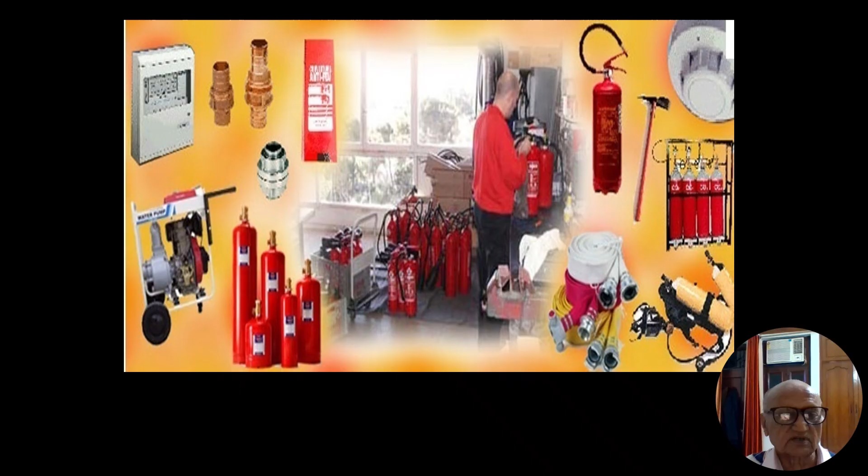This particular slide shows various type of firefighting appliances used in firefighting systems. You can see different type of appliances here in this list.

Friends, engineers and architects and consultants, this is first and foremost warning from me: the firefighting system of any building has to be designed as per National Building Code of India 2016, which is getting converted into the 2025 version also. First, you have to follow the local building bylaws, which inter alia recommend always the National Building Code, in any part of India.

As per Delhi building bylaws, it is the designer who is supposed to submit the following to Delhi Fire Service. Let me tell you that most of the drawings submitted to the authority having jurisdiction are rejected mostly due to the firefighting designs applied for that particular building.

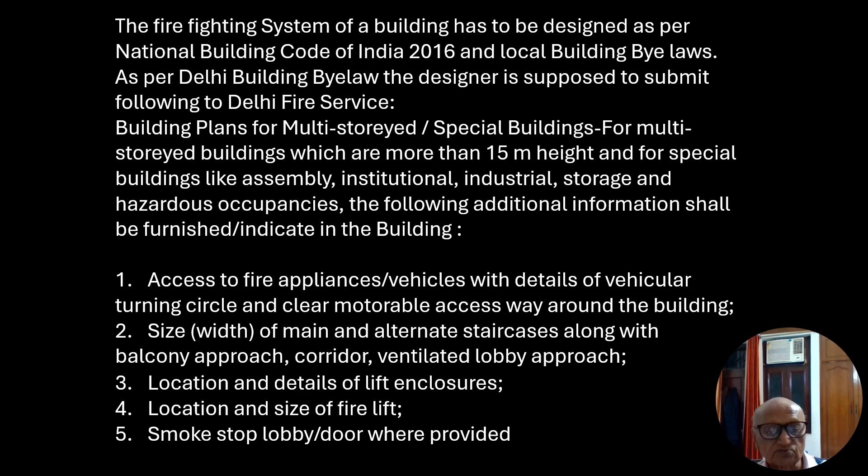In the previous slide, I have discussed all those features which are to be provided in the building drawings being submitted by the architect for building permit initially. Sixth, I have already described 5 items. The sixth item is refuse chutes, refuse chamber, service duct, etc. are to be shown.

Seventh, vehicular parking space. Eighth, refuge area if any. The refuge area becomes necessary only after 5-story buildings. That means beyond 15 meters. Ninth, detail of building services including air conditioning system with position of dampers, mechanical ventilation system, electrical services, boiler, gas pipe etc.

10th, details of exits including provision of ramps, etc. for hospital and special risk buildings. 11th, location of generator, transformer and switchgear room. 12th, smoke exhaust system if any provided. 13th, detail of fire alarm system network. 14th, location of centralized control connecting all fire alarm system, built-in fire protection arrangement and public address systems.

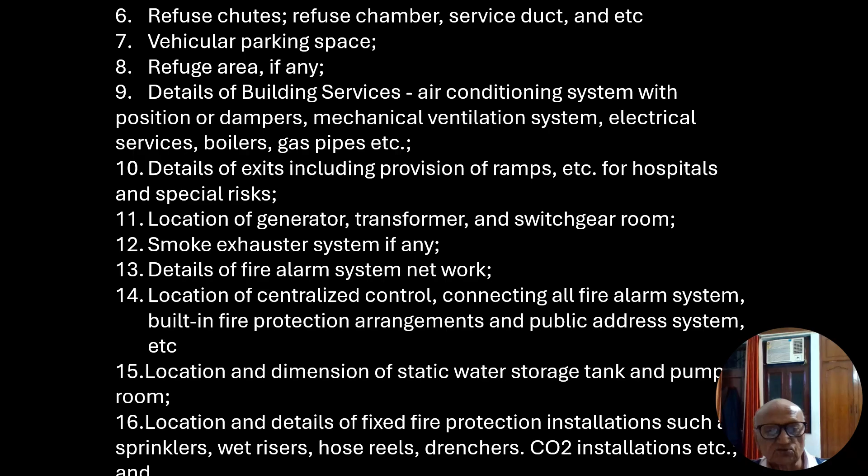Dear friends, consultants and architects, this is the most important part of this series of lectures, that is known as classification of building based on occupancy type. The National Building Code 2016 provides 9 different type of buildings. They are known as Group A or B or C, like that.

All buildings, whether existing or hereafter erected, shall be classified according to use or the character of occupancy in one of the following groups. Once the area has been assigned by the town planner as one particular type, it cannot be easily changed to other type. That is the relevance of grouping. Group A is residential buildings. Group B is educational buildings. Group C is institutional buildings.

Institutional buildings are those where the persons occupying are summoned to get into due to some or the other orders, maybe from a legal court, maybe from a doctor or some other body. Group D is assembly type. Assembly type of buildings are those where people assemble, large number of people assemble for a short time.

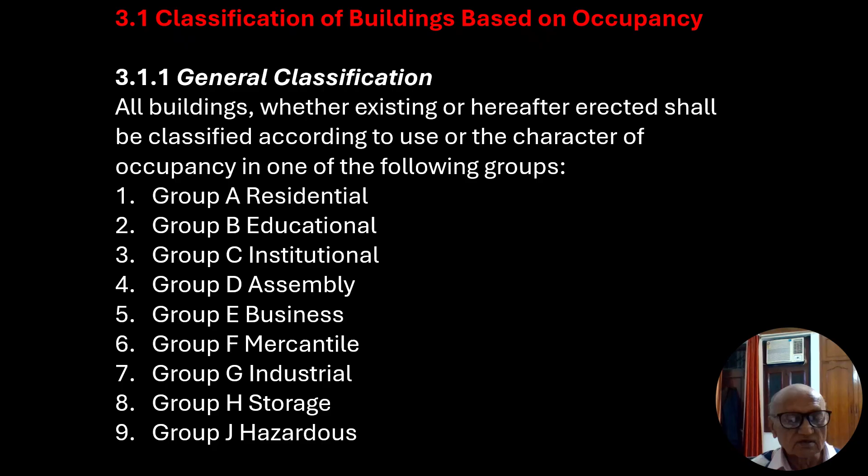Group A residential buildings. Dear friends, the residential buildings are existing anywhere, any type of occupancies. They are classified in four subdivisions. A1, known as lodging and rooming houses and dormitories. Dormitories may be in the form of dharamsala.

A2, one or two family private dwellings, which are for individual use. The buildings in subdivision A3 are known as apartment houses, and subdivision A4 is known as hotels. In hotels, people are residing for very short time.

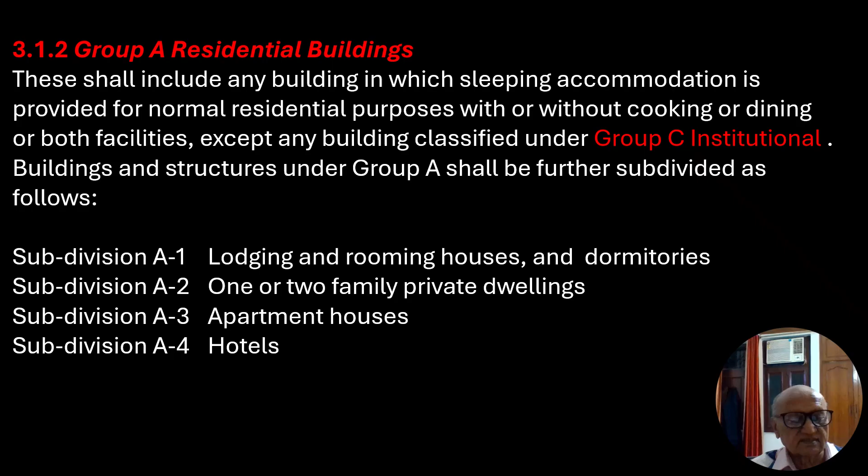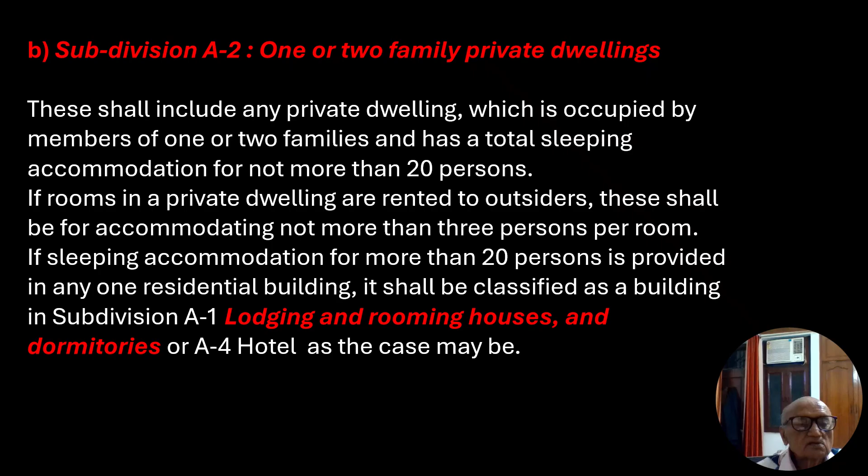Subdivision A3, apartment houses. If we count by number, these occupy the largest subgroup. These shall include any building or structure in which living quarters are provided for three or more families living independently of each other and with independent cooking facilities. For example, apartment houses, mansions, and chawls.

Subdivision A4 includes hotels. This shall include any building or group of buildings under single management in which sleeping accommodation is provided, with or without dining facility, for hotels classified under all hotels including starred hotels.

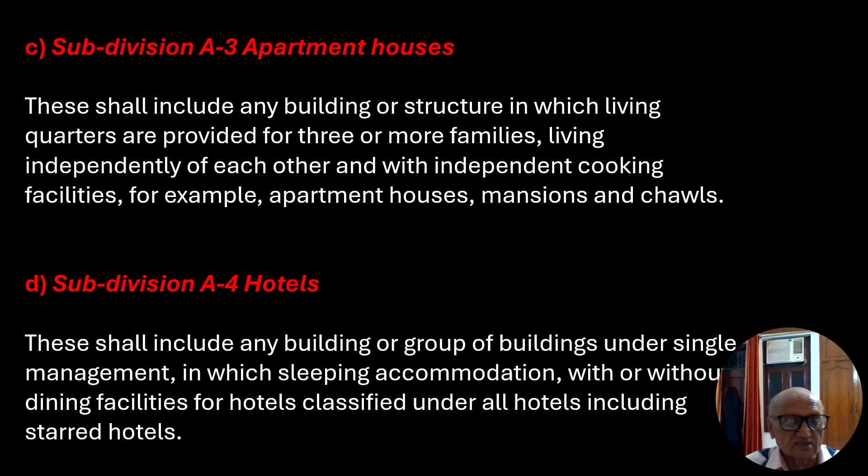Now we are defining group B, educational institution type of buildings. The group B includes any building used for school, college or other training institutions for daycare purposes involving assembly or instruction, education or recreation for not less than 20 students. Group B is subclassified as B1, schools up to senior secondary level, and B2, all other training institutions.

The B1 group includes schools up to senior secondary level. This subdivision shall include any building or group of buildings under single management which is used for students not less than 20 in number. Subdivision B2 includes all other educational buildings. This subdivision includes any building or group of buildings under single management for students not less than 100 in number.

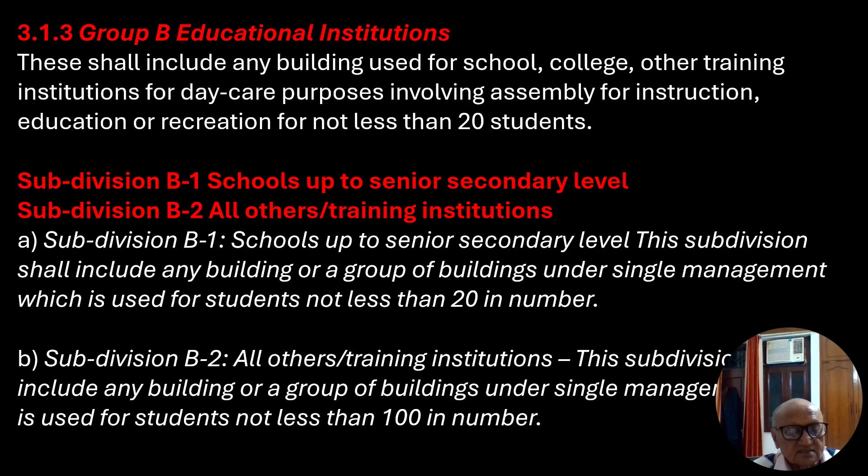Now we come to the group of buildings known as institutional buildings. Institutional buildings shall include any building or part thereof which is used for purposes such as medical or other treatment or care of persons suffering from physical or mental illness, diseases or infirmity, care of infants, convalescent or aged persons, or for penal or correctional detention in which liberty of the inmate is restricted. Institutional buildings ordinarily provide sleeping accommodation for the occupants.

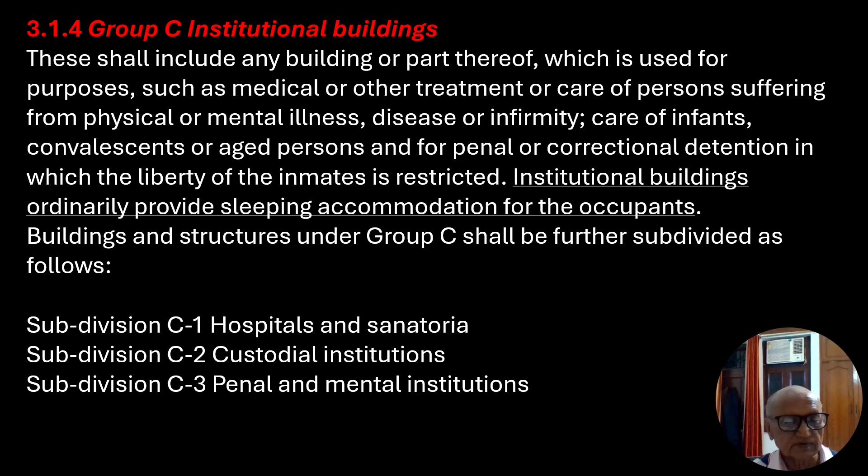Buildings and structures under Group C shall be further subdivided as follows. Subdivision C1, hospitals and sanatoria. Subdivision C2, custodial institutions. C3, penal and mental institutions.

Dear friends, in the previous slide we have discussed the buildings known as institutional buildings, out of which the subdivision C1 is known as hospitals and sanatoria. This subdivision shall include any building or group of buildings under single management which is used for housing persons suffering from physical limitations because of health or age and those incapable of self-preservation. For example, hospitals, infirmaries, sanatoria and nursing homes.

The group C2 includes custodial institutions. This subdivision shall include any building or a group of buildings under single management which is used for custody and care of persons such as children, convalescents, and aged persons who are incapable of self-preservation. For example, homes for the aged and infirm, convalescent homes, and orphanages. Both these types of buildings as a group are known as healthcare buildings.

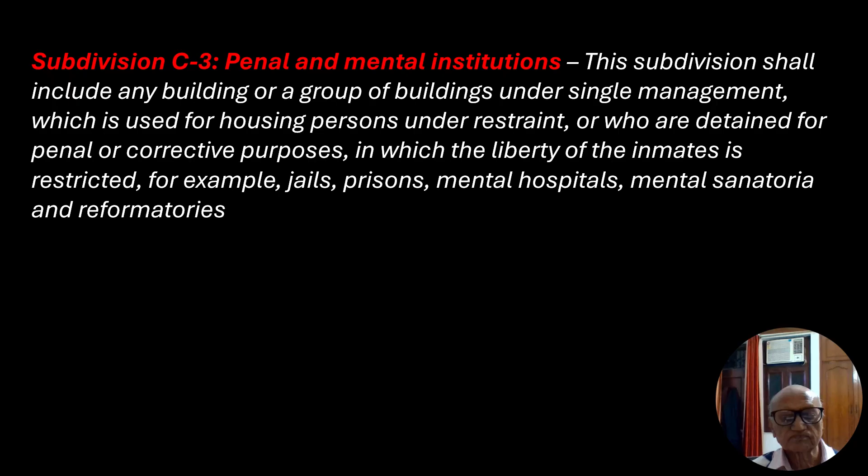Friends, now we come to Group D, assembly buildings. Assembly buildings shall include any building or part of a building where a number of persons not less than 50 congregate or gather for amusement, recreation, social, religious, patriotic, civil, travel and similar purposes.

For example, theaters, motion picture houses, assembly halls, auditoria, exhibition halls, museums, skating rinks, gymnasiums, restaurants, places of worship such as mandir, masjid, gurudwara, dance halls, club rooms, passenger stations and terminals of air, surface or marine public transportation services, and stadia.

Buildings under D shall be further classified as follows. There are four different types of buildings. We'll discuss them in the next slide. Remember only one thing, that assembly buildings are occupied by more than 50 persons.

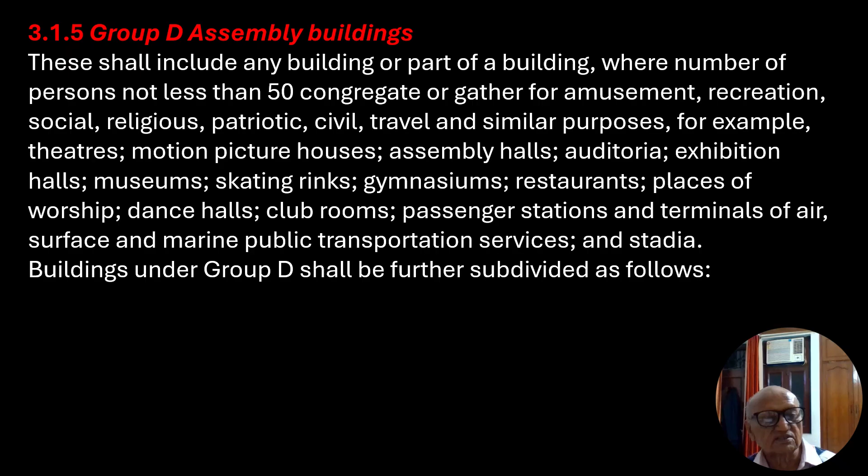Assembly buildings are further classified in four different categories. The first one is D1, buildings having a theatrical or motion picture or any other stage and fixed seats for over 1,000 persons. It's a very large type of system. D2, buildings having a theatrical or motion picture or any other stage and fixed seats up to 1,000 persons.

D3, buildings without a permanent stage having accommodation for 300 or more persons but no permanent seating arrangement. Dance halls, nightclubs, incidental picture shows, dramatic, theatrical or educational presentations, lectures, etc. The type D4, buildings without a permanent stage, having accommodation for less than 300 persons with no permanent seating arrangement.

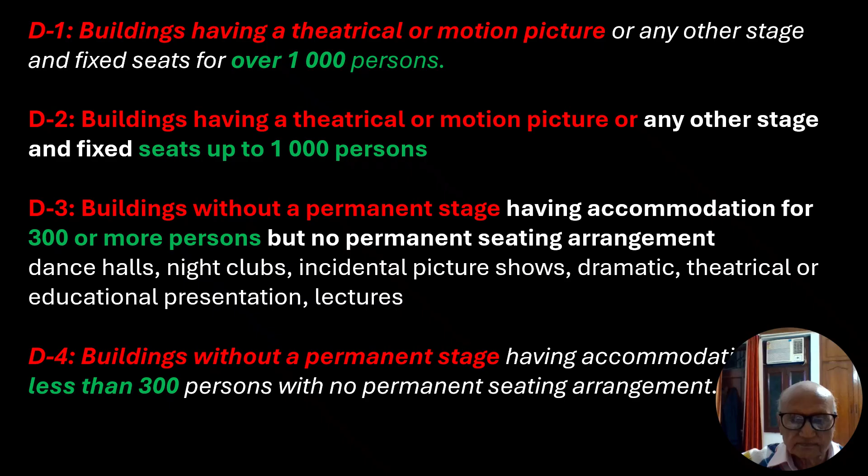The further classification of assembly building is type D5, type D6 and type D7. The type D5 assembly building includes other structures, including temporary structures designed for assembly of people not covered by subdivisions D1 to D4 at ground level, like grandstands, stadia, amusement park structures, reviewing stands and circus tents, arenas, external swimming pools, tennis and similar types of courts.

The sixth type of assembly building is having mixed occupancy, such as shopping malls providing facilities such as shopping, cinema, theater, multiplexes and restaurants, food courts, and having other occupancies such as offices, retail, residential, mercantile, etc. in one building. Type 7 is classified as underground and elevated mass rapid transit systems, underground or elevated railways.

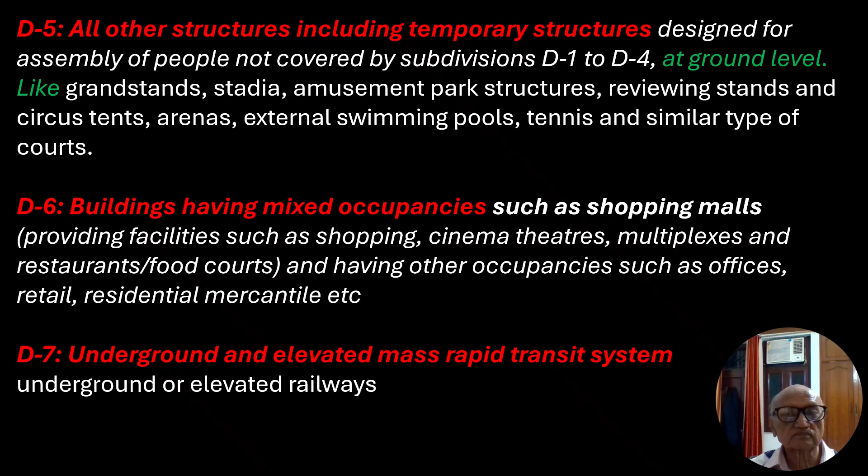Friends, now we are discussing Group E, business buildings. This shall include any building or part thereof which is used for transaction of business, for keeping accounts and records and similar purposes, professional establishments, service facilities, etc. City halls, town halls, courthouses and libraries shall be included and classified in this group so far as the principal function of these is transaction of public business and keeping of books and records.

The group E buildings are further classified in 5 different types. The first one is offices, banks, professional establishments like offices of architects, engineers, doctors, lawyers, post offices and police stations. E2 subdivision of business building is known as laboratories, outpatient clinics, research establishments, libraries and test houses. The third subgroup E3 of business building includes electronic data processing centers, computer installations, information technology parks and call centers.

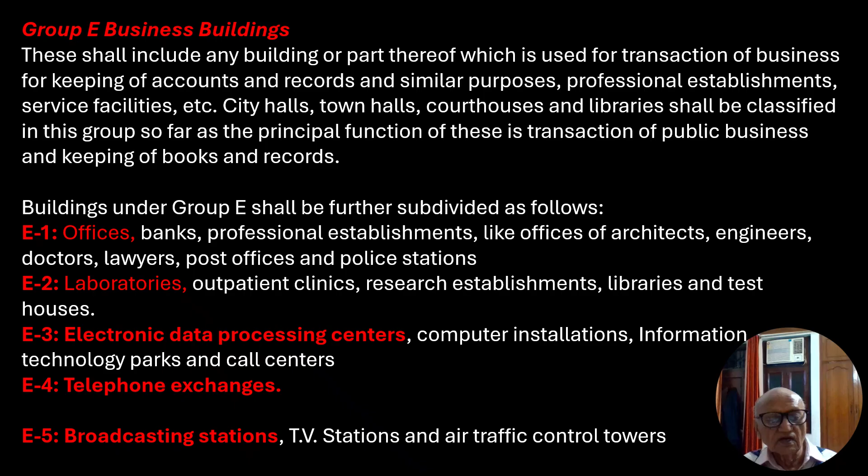The fourth category of business building is telephone exchange. And the fifth one is broadcasting stations, TV stations, and air traffic control towers.

Friends, the next group of building is known as mercantile building. The word mercantile comes from merchant, that means Vyaparis in Hindi. This shall include any type of building or part thereof which is used as shops, stores, market for display and sale of merchandise, either wholesale or in retail. Mercantile building shall be further subclassified as subdivision F1, shops, stores, departmental stores, markets up to covered area 500 square meter.

The subdivision F2 of mercantile building includes shops, stores and departmental stores, markets having covered area more than 500 square meter. The third classification of mercantile building is underground shopping centers. Storage and service facilities incidental to sale of merchandise located in the same building shall be included under this group.

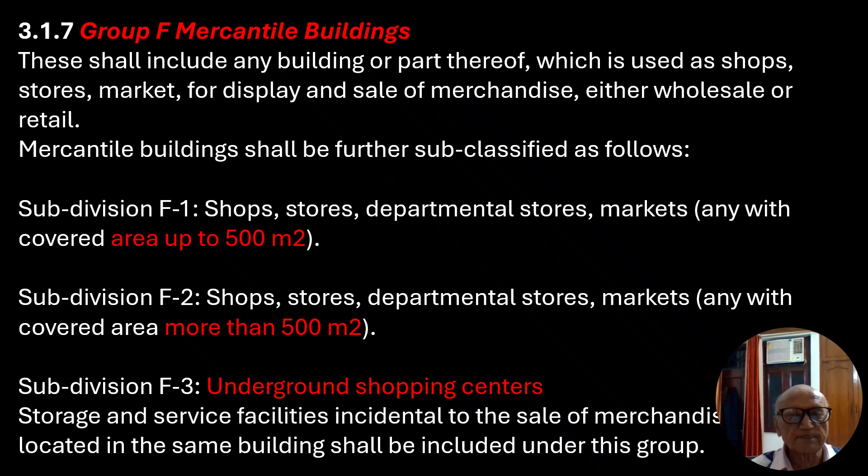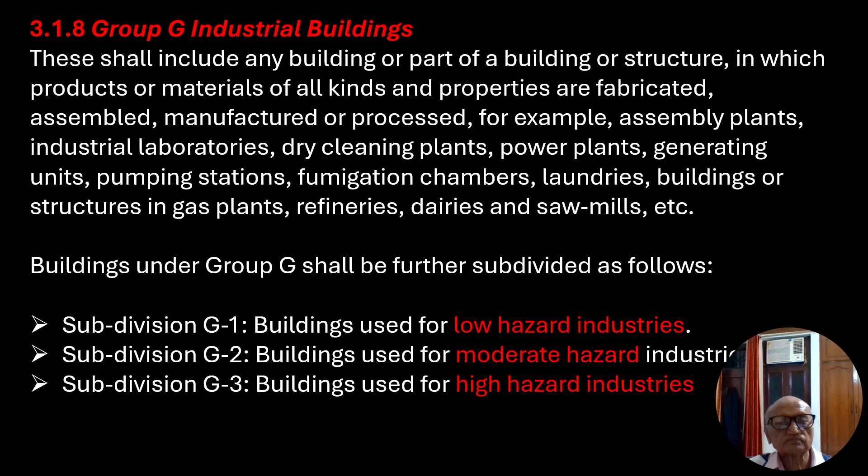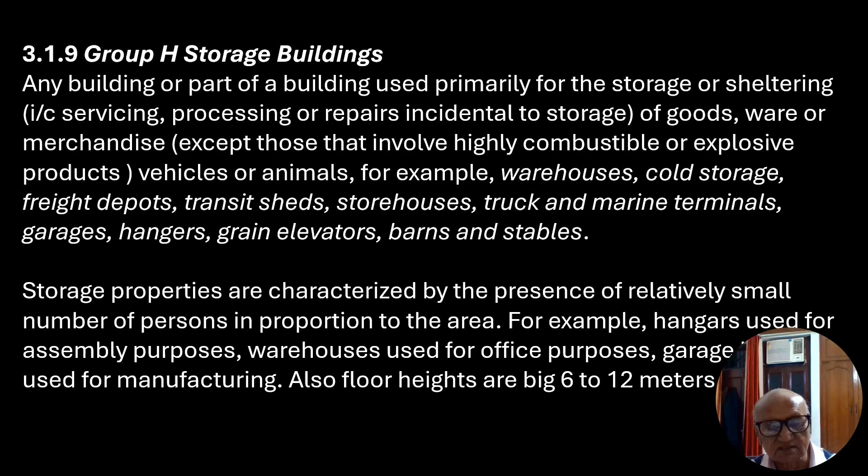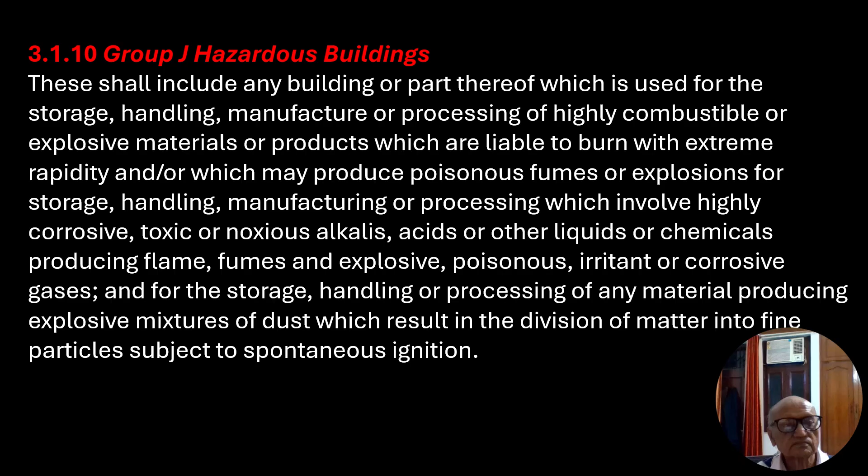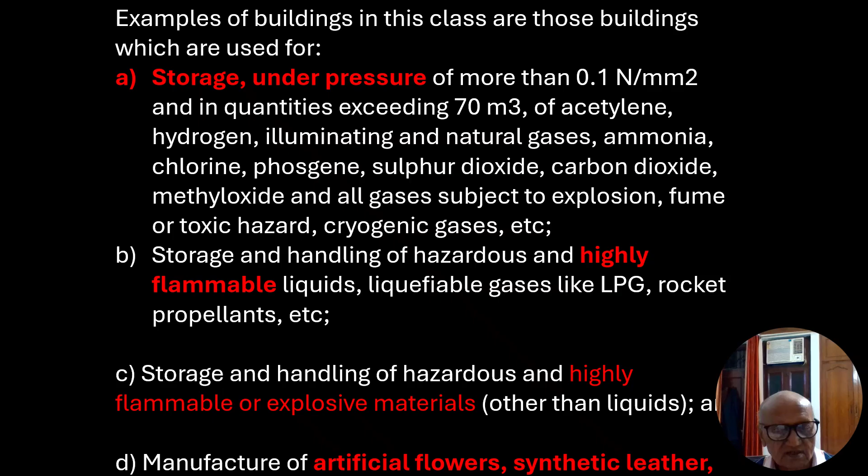Type B includes storage and handling of hazardous and highly flammable liquids, liquefiable gases like LPG, rocket propellants, etc. Type C includes storage and handling of hazardous and highly flammable or explosive material other than liquid. Next is subtype D, manufacture of artificial flowers, synthetic leather, etc.

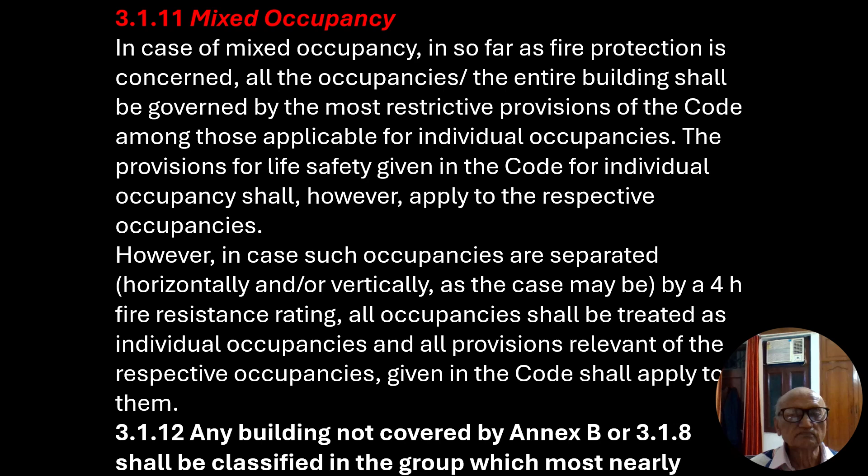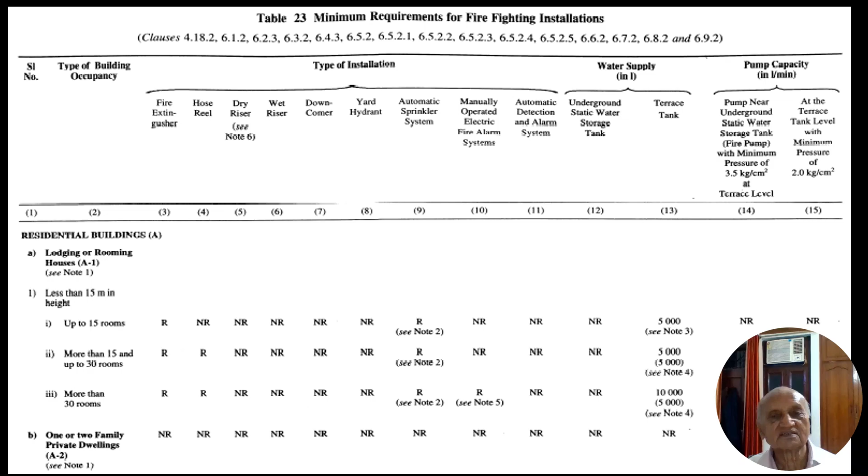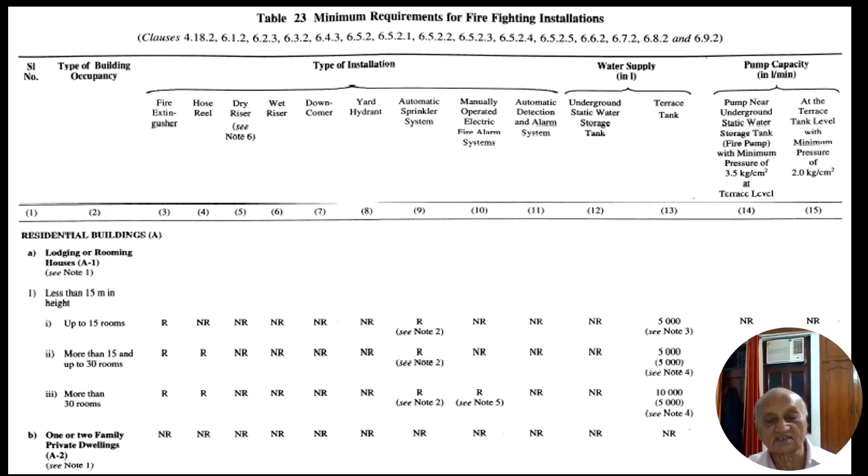The next two give you the capacity of underground and terrace tanks, and you can see note numbers 3, 4 like this, and they are clarified in the last table of this series. Similarly, if a pump is required, their capacities are given here along with the terrace tank if needed. You can go and see different types of detail in this series of tables, and at the end you can find whatever is missing in this table; that clarification, see note number 2, note number 3, those details are given in the last table of this series.

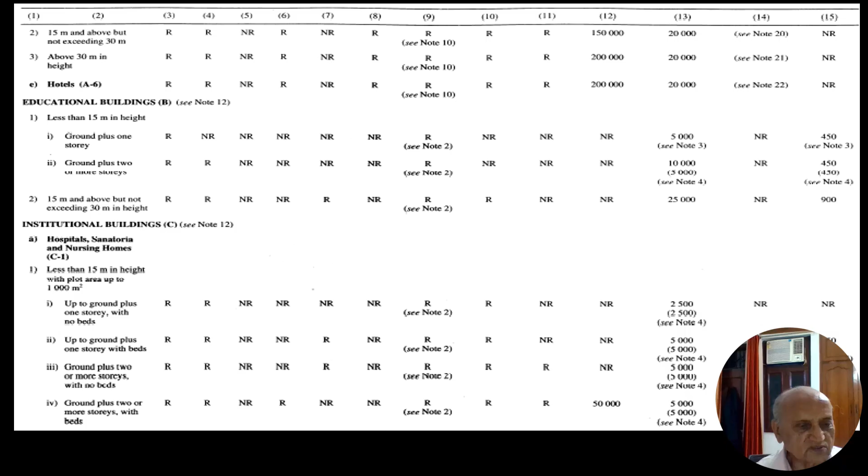Friends, I will discuss type 4, institutional buildings. It provides C1, hospitals, sanatoria, etc. And in this subcategory A, they have, according to height of the building, less than 15 meters. Subcategories are up to ground floor, ground floor plus 1 story, and all provisions which are to be made are clarified in each row.